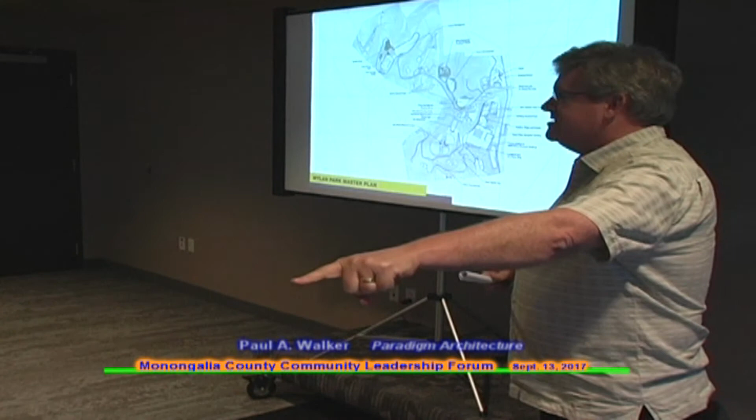Well, I appreciate that, but I also knew the character of the people we were working with, and that means a lot too. I'll say this - these are a little fuzzy, so I have four sets of drawings we can pass around if we need to, so you can look at the detail. I've got about 10 minutes, so I'm going to go through this quick. If you have questions, please just ask - I'd be happy to interject.

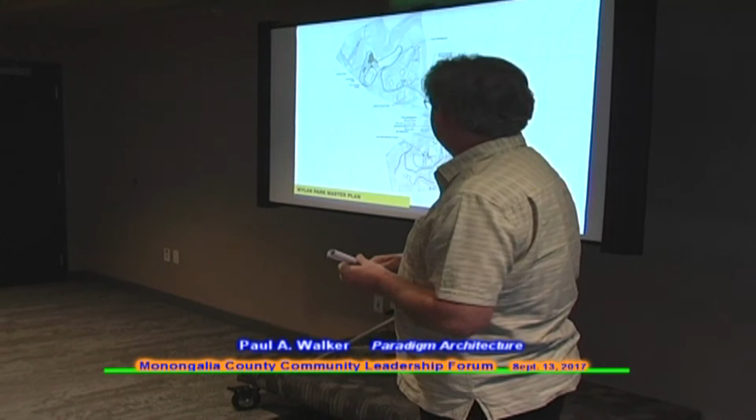It all starts with a master plan, and it started with the master plan we developed for Mylan Park. That was kind of the first phase of what we were doing, because we were looking at where we're going to place these structures, and how that's going to fit into the context of the overall planning for development and expansion growth within Mylan Park.

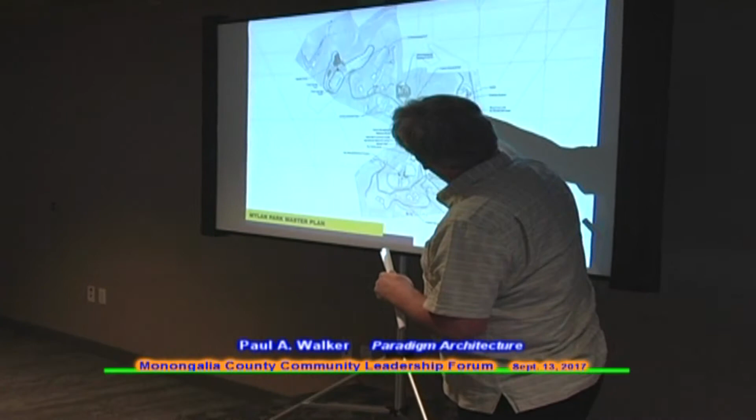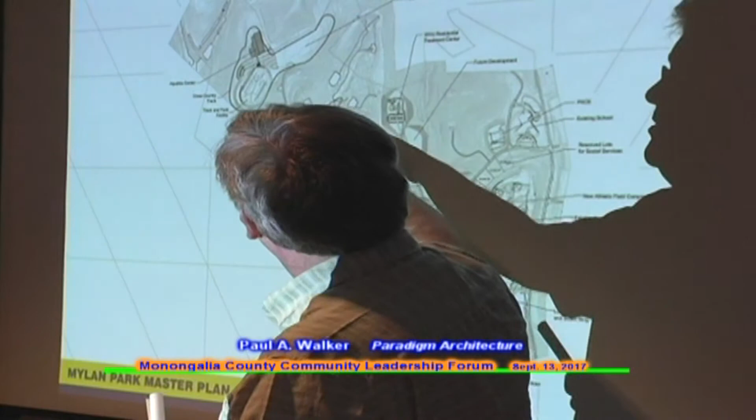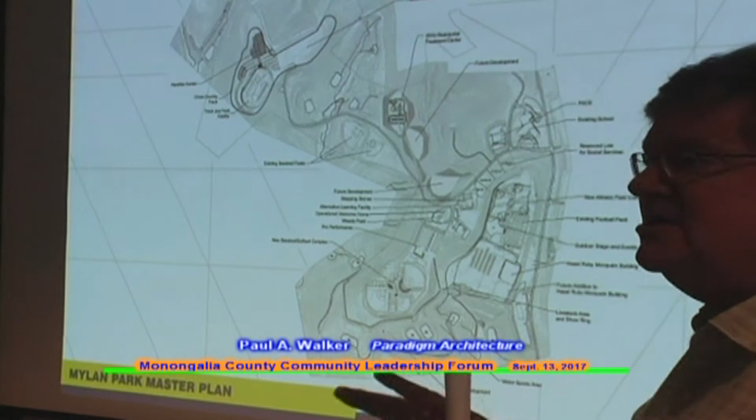So just to walk you through in a broad sense, this is the elementary school, and we go back down the hill to the interstate. This is the road that goes back. This is the fitness center, and these are the existing ball fields out there. The road continues back, with a couple more ball fields. This goes all the way back to where, if you recall, there's an equestrian center on top of the hill - it's never really been utilized much from my understanding, but that's the location identified for this complex. Let me go into more detail.

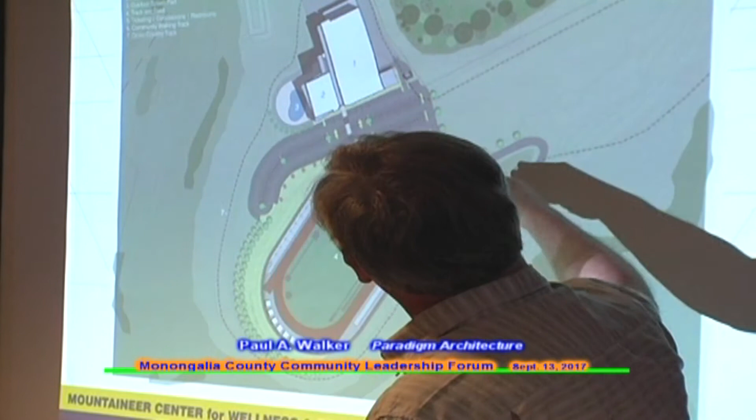This is a focused view of the plan for this wellness development. You see the track and field facility, and then the aquatic center with parking. You come up the hill, reach the peak at the top, and then you're seeing all of this development. There's a lot of adjacent land still prepared, ready for future developments, so great opportunities still exist.

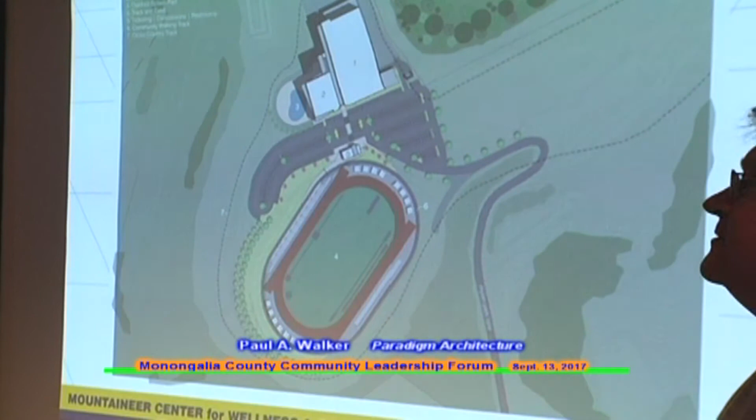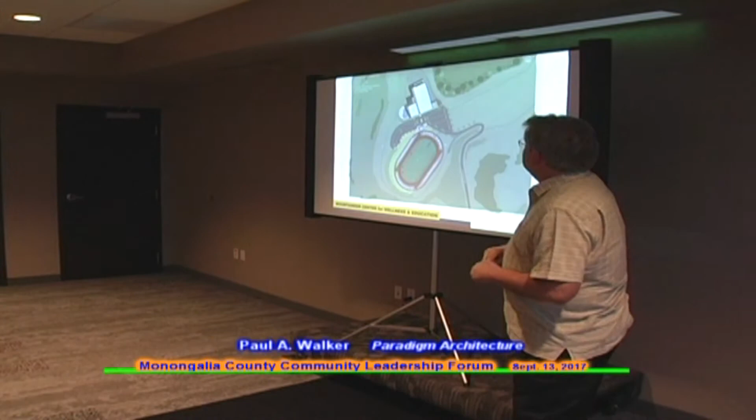When you said equestrian center, is that moving, going away, disappearing, what? We've had a problem with that. We have an equestrian center that we've never had a horse on. So it will probably just kind of go away for right now, and we'll work with the 4-H on it. I remember that being talked about. We would have liked to have brought at least one horse up there to run around, at least to say we met that goal. That was a promise on the council. Yes, okay.

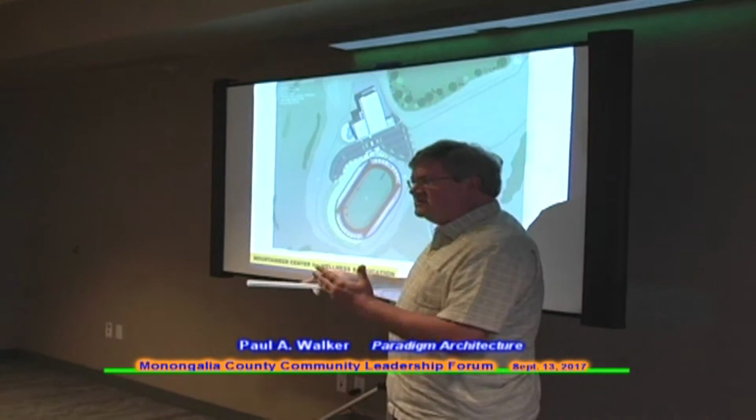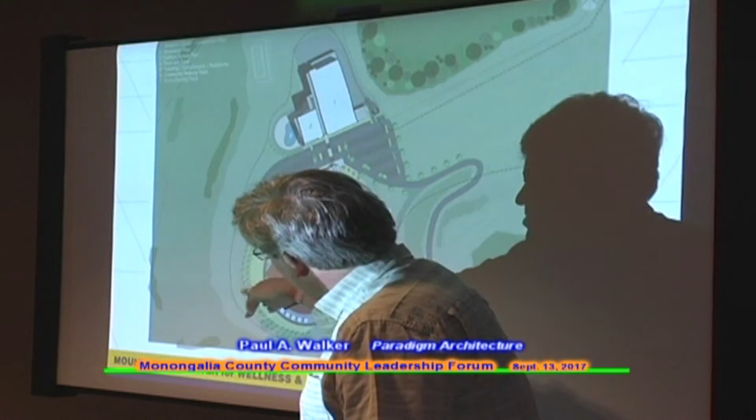To understand the components in a little more detail, the track and field facility has about 1,000 to 1,200 spectator seats. Part of the study we did involved the very windy conditions that exist up there. By creating this berm that wraps around it, with a planting wind barrier, we're also able to offer an expansion of seating, so that if you have a really large event, you can fill that hillside with folks and they can take advantage of that.

The track and field has inside seating, and the press box is near the finish line, down on this end. This also shows the potential for setting up tents for teams to use and that sort of thing. So all of that's accounted for.

There's a fence around the perimeter of this complex, and outside of that fence is the community walking track. This will replace folks walking directly on the track surface, which preserves the life and maintains the quality of that facility. All the way around the perimeter is a 6-foot wide surface for folks to walk on, and that can be operational 100% of the time.

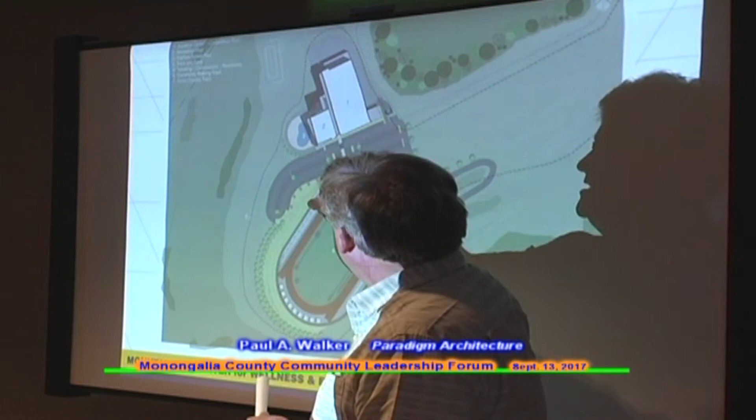This small facility you see supports the track—it has ticketing, concessions, and restrooms. Underneath it is a basement space where all of the track items will be stored, along with the concessions and everything that goes along with that.

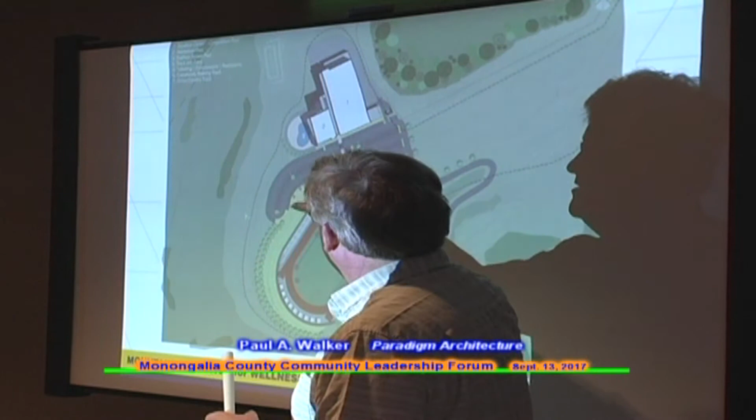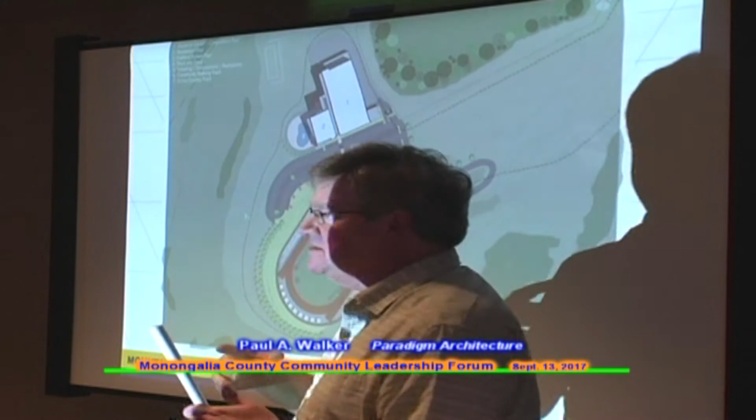In the back of the property is the aquatic center—we'll get into that in detail—but you can see the outdoor terrace space. One thing Christiansburg really liked was this abundant outdoor space, giving people the opportunity not just to be inside but, on nice weather, to get outside. In our case we have a splash zone for the younger kids, so it's a lot of fun on the outdoor space without actual swimming activities, and that's going to be located there.

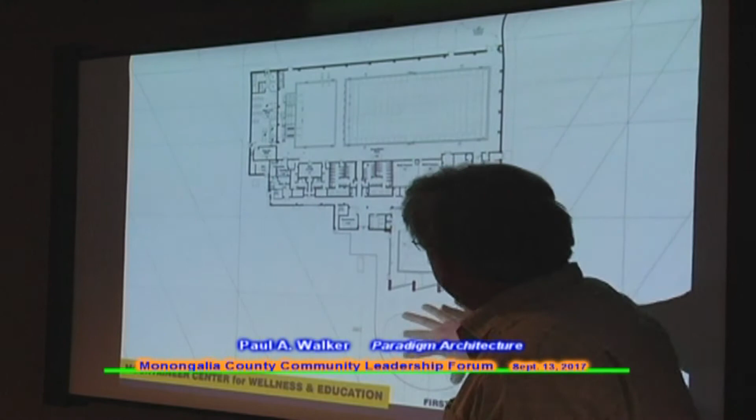This is our front door, and this is that splash zone I was just pointing out to you as a point of reference. We have a primary corridor that ties all of the functions together from the front door, so when you come in you have control and reception for folks to check in.

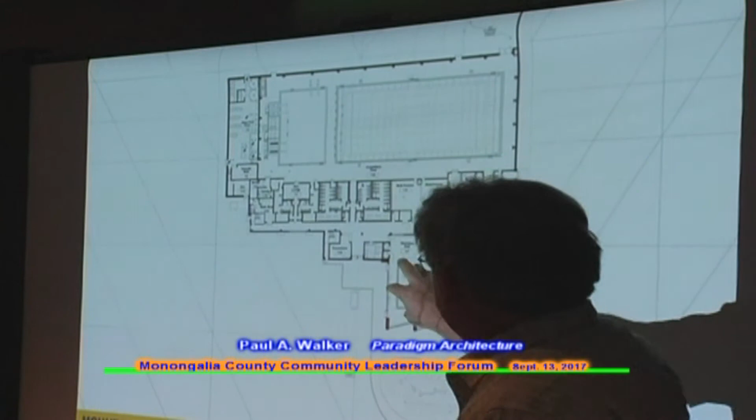On this side, everything is recreational—you have swimming lanes, water basketball, implements that dump water and do all the fun things folks want, as well as a water slide that slides down this side of the pool. Then there's the support equipment for this pool, and a concession area positioned to serve both indoor and outdoor spaces.

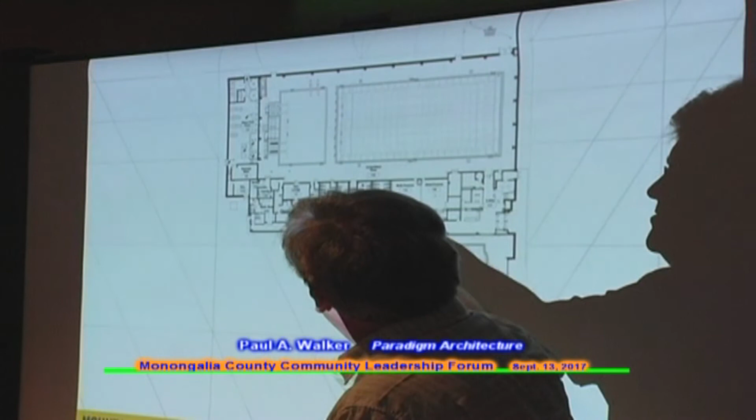So we'll have concessions as part of this project. All down the middle are the support functions for the pool area—locker rooms for the public, and locker rooms for the swimming and diving team. We have multi-purpose rooms similar to this; they can be subdivided, and they can program basically anything imaginable into those spaces. It has a kitchen that can support it, so if activities require food, it's there and ready. What are the sizes of those rooms?

I'd say they're similar in size to what we're talking about here—I think 2,200 square feet is what I saw. Yeah, okay.

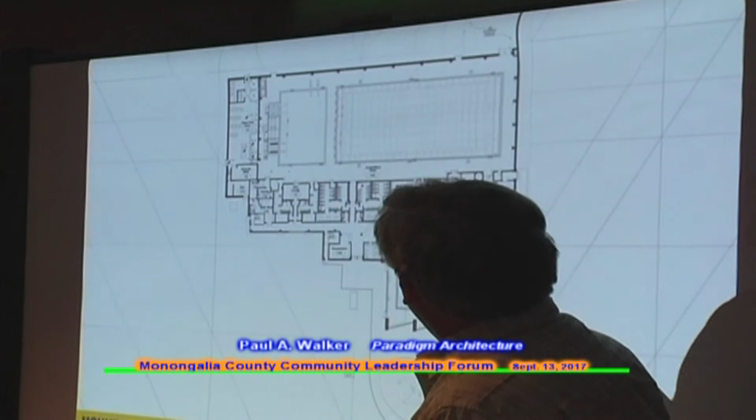I was looking at this before, and I think this is a good visual of what those rooms are going to be like. Each one has its size, yes, there's one here and one here. And then there's storage, various storage rooms that support both this space and the pool area. On this side is a large open stair that gets you up to the upper levels, as well as the elevator. So all of that's contained right near the front door.

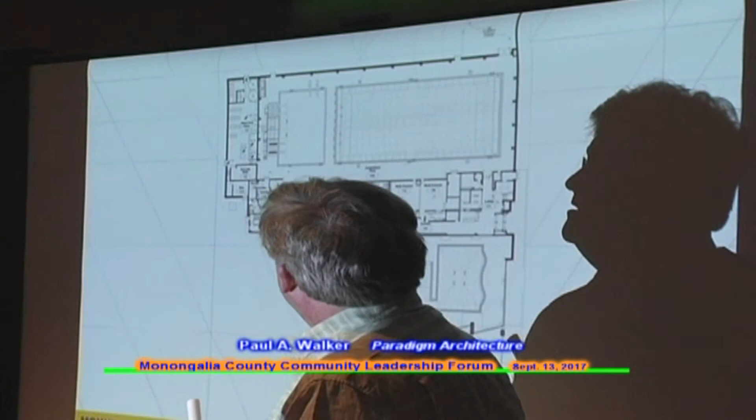And of course, this is the competition side with a 50-meter pool, and then the separate diving pool here. So when you look at the Olympics and you see the large platform diving features, you have a 1 meter springboard, and a 3 meter springboard, and all of the various levels. That's what you're going to be seeing in this facility.

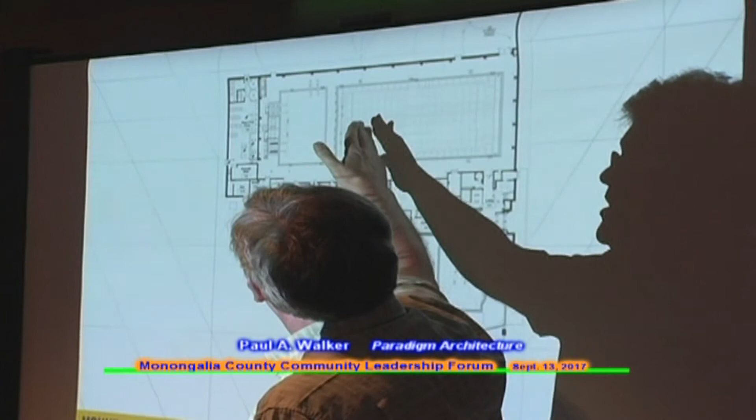There is, of course, a separation between these two. There's a feature referred to as a bulkhead, which is really a divider - it's like a movable divider that can be positioned wherever you need it within that pool area. So you can take this 50 meter pool and bring the bulkhead across to the middle. You could have one high school team practicing here and another high school team practicing on this side, all going on at the same time. Probably the bulkhead will be in some position a lot of the time, just to create more flexibility in the use of the facility.

Paul, what's the width on the pool? The length is 50 meters, but what's the side to side? It's 8 lanes. I mean, it is a true Olympic-sized swimming pool.

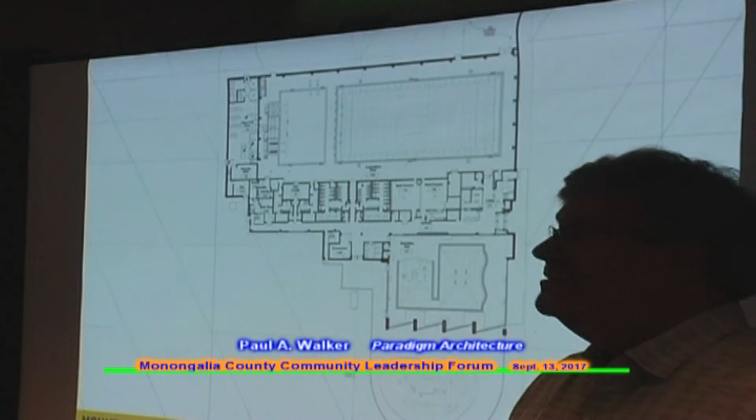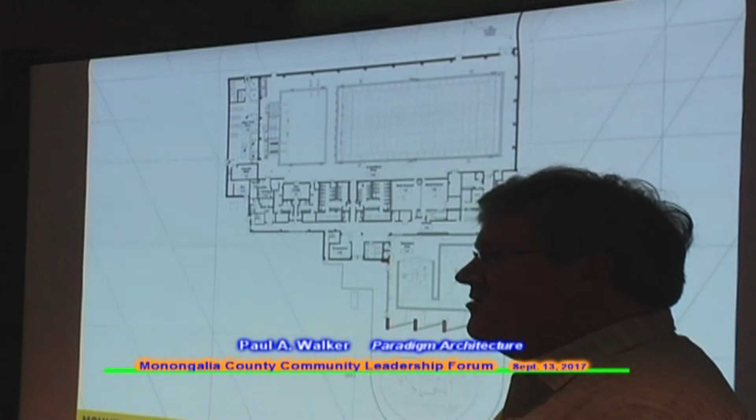A couple of other features that are really important to understand about the facility. One of the things in Greensboro that was a real problem was the air quality within the space. So one of the things we learned about is what the best technology that exists is to deal with that. And so what we've done is not only incorporate the standard systems for control of air quality, but we have what's called an evacuator system - it's the cutting edge technology for this.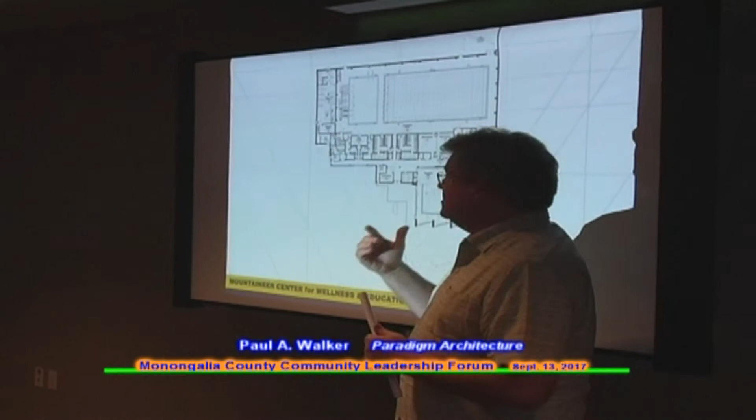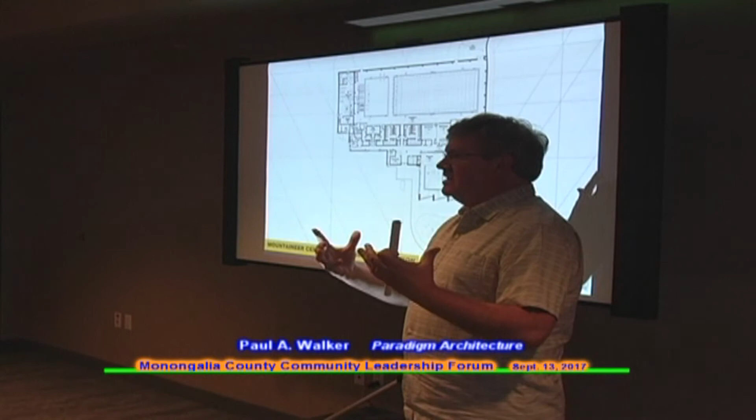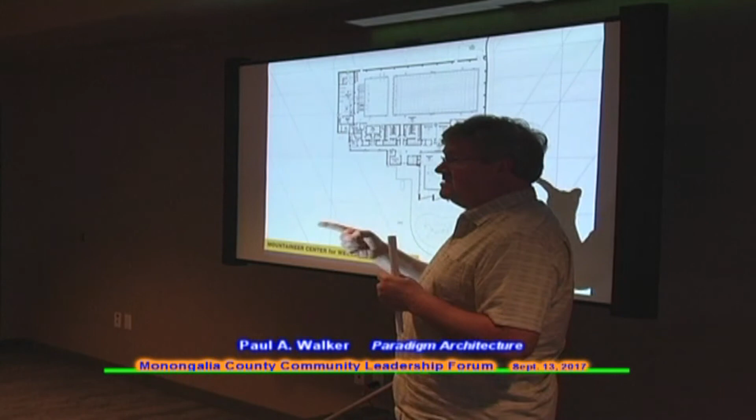So what it basically does is fit into the gutter of the pool and literally pull the air off of the surface of the pool. So this means you never get that chlorine odor and some of the other issues that become almost toxic in the environment that's created there. Greensboro was so bad they were having a hard time operating, so they literally came back and put the same system in as a retrofit after the fact. So, yeah, pretty excited about that.

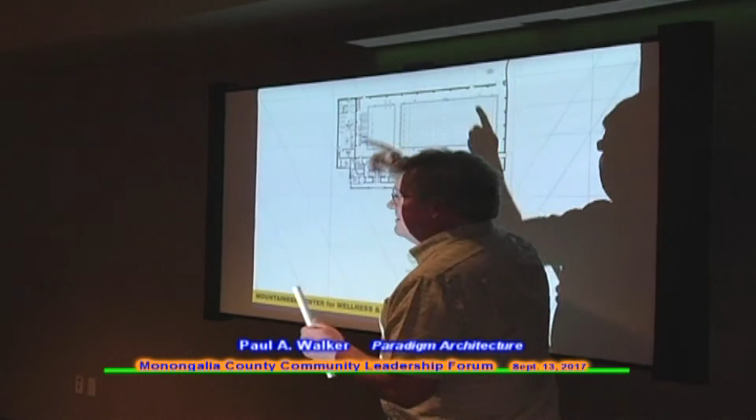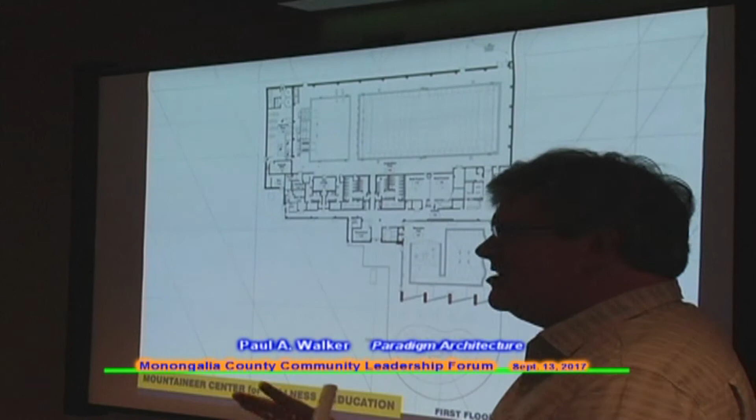And then one other feature, small but really important, is this large outdoor storage space - it's kind of an open shed. The purpose of that is there's a lot of large items that get used and have to be stored. When teams are practicing or activities are going on, you have floats, practice mats, all kinds of items that become very large and very consuming of the deck space, which becomes very important.

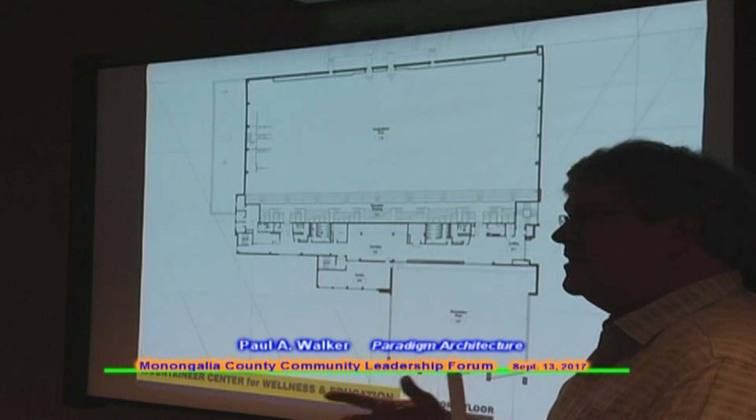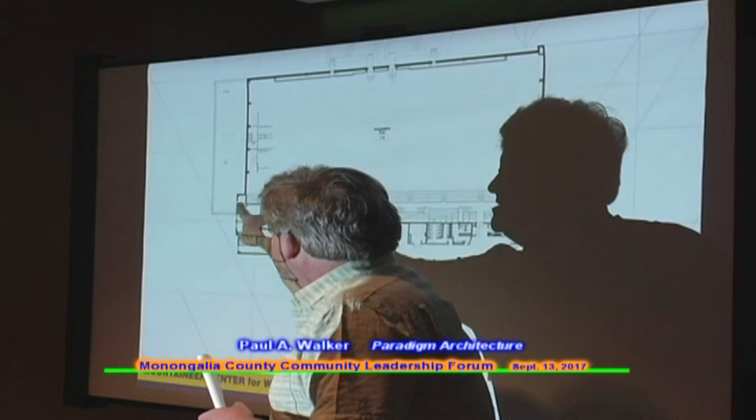So all of that stuff can be pulled out, undercover, and kept so that it's good and operational. And then finally, this is the upper level. Once you come upstairs via the stair or the elevator, this is basically a large concourse space, devoted more toward spectator use. So you're coming out into a large seating gallery where you can seat 12 to 1,300 people. We have restrooms that support those, and areas where concessions will be set up, along with various support and administrative functions that support the facility.

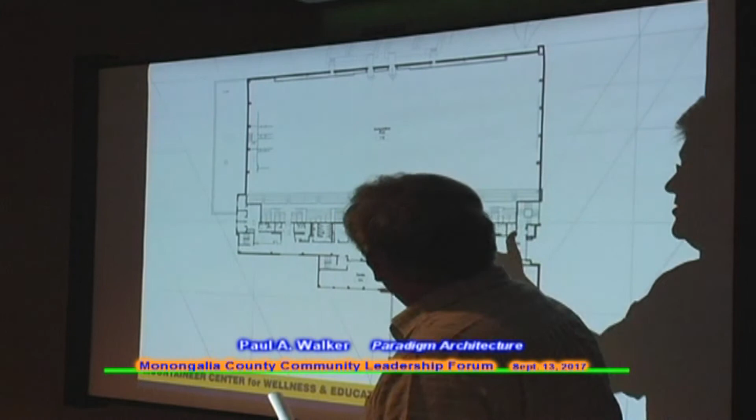And one of the later additions was this cardio room - an exercise fitness center for people that are members or want to use the facility. So again, from this level, you enter into the pool from the back side, and you have basically the competition side of that.

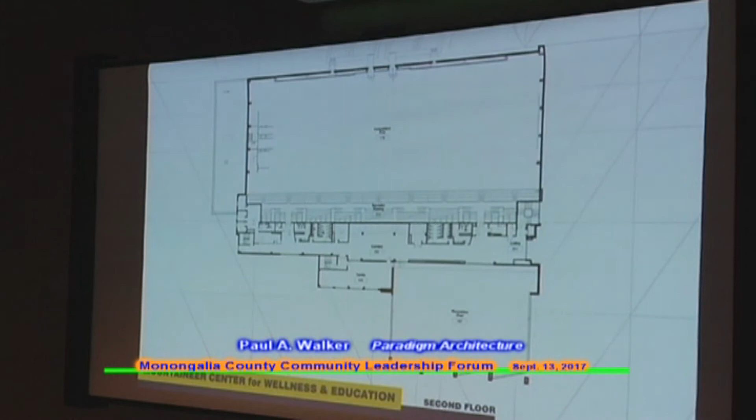I didn't see an elevator. Yeah, it's right here. Okay, thank you.

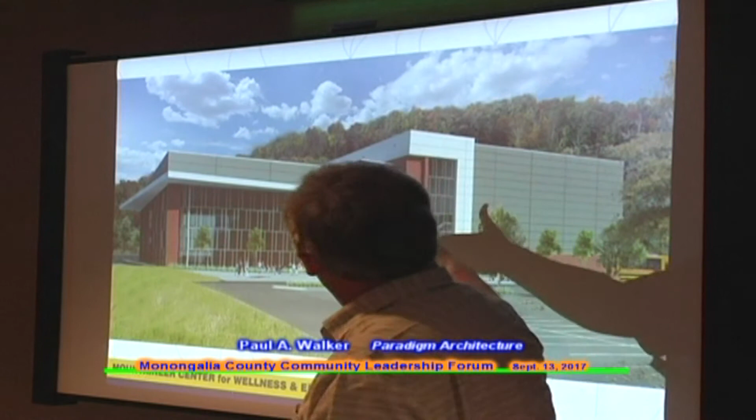And so this is a rendering of the facility. This is what it will look like. So what you're seeing is you come in the front door, you're entering into that corridor space, and then this is all recreation. So there's huge glass areas associated with the recreational pool.

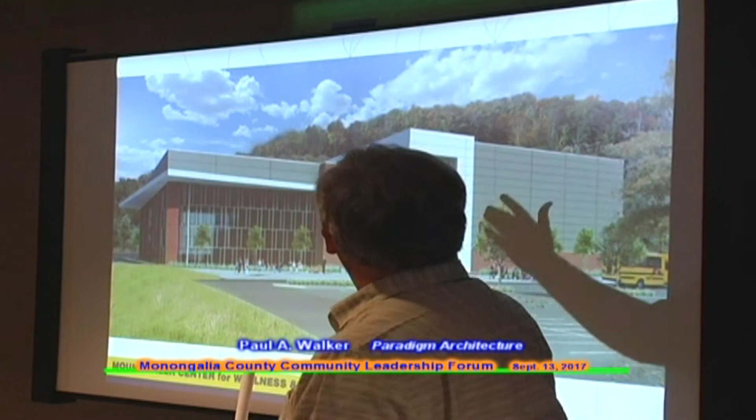On the competition side, lighting can be a distraction, it can be a hindrance, so that it's more of a solid box. This is that stairwell that gets you up to the various levels. And this sits at the very back of the property, and the track is across from it. There we are.

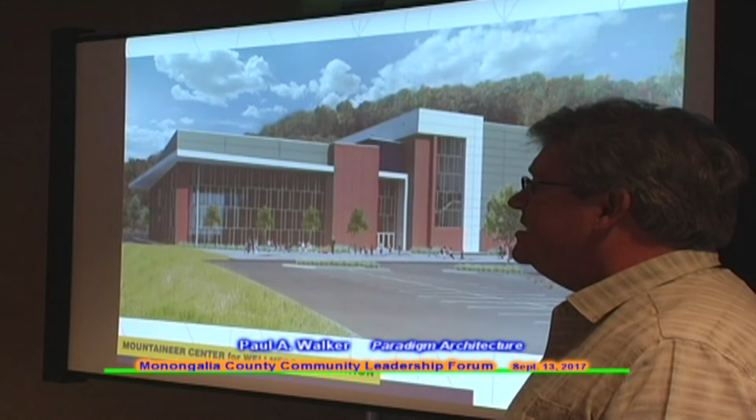We've had, in the past, other renderings of various parts of the building. All of those renderings are really kind of conceptual illustrations of the components. Because of the detail that we're in now, we really want the representation to be accurate. This is accurate. Some of the other things are evolving as we get into the final details, like the recreation pool. Two very brief things, because I know we have to move.

One of the reasons we added the cardio where it was, you can overlook the pool where the kids would be, but mainly we had senior groups like OLLI and others that said two things we would like: we'd like to have that meeting space, and we don't want weight facilities, we want more of the cardio. So that was designed.

Maybe the more important thing is that although we told Paul to design an Olympic pool, and we think of that as one of the key components of this, with WVU using it along with high school teams, quite frankly, from the very beginning of Mylan Park -- and Frank's one of our board members -- one of our primary missions is that we have over 300 people a day with special needs, disabilities, who use this facility. When we went into this, one of the things we told Paul was: don't design it to host the NCAA regionals, design it to host a Special Olympics National.

Paul can tell you that, right, Paul? That was his charge. It'd be great to host that, but we're not going to lose sight of what our mission is, and that is that this needs to be available to all people in the community, and we're going to stick to our mission.